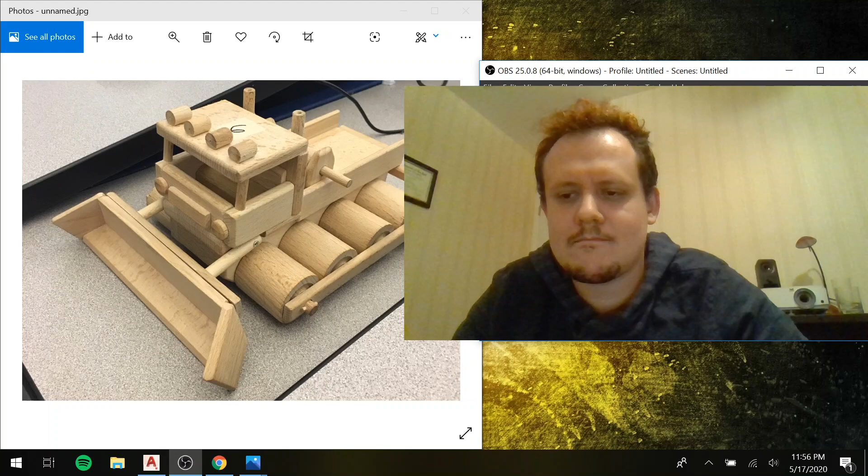I'm going to discuss the final project, which is very exciting. We get to take all the skills we've accumulated throughout the entire semester and put them together to create one final project.

The final project is worth a huge chunk of your grade, 20%, the biggest single item. But you'll have a lot of time to work on it. Today is May 18th, and the last part of your final project will be due on June 5th.

Let's get started with the first thing you'll need to do. If you go to classwork, you'll see a submission for a project proposal. You're going to take a toy or item from your household to recreate as a freehand sketch, create an orthographic of some of its parts in AutoCAD, and create a 3D model of it in AutoCAD. I'll go through these one at a time.

On the left side of the screen is an example of a toy that could work for this final project. This is a toy we'd actually use in class, and a lot of people have made this exact project. It's a great example because there are lots of little components but not crazy details, so you can make everything with extrusions. This is an ideal project choice.

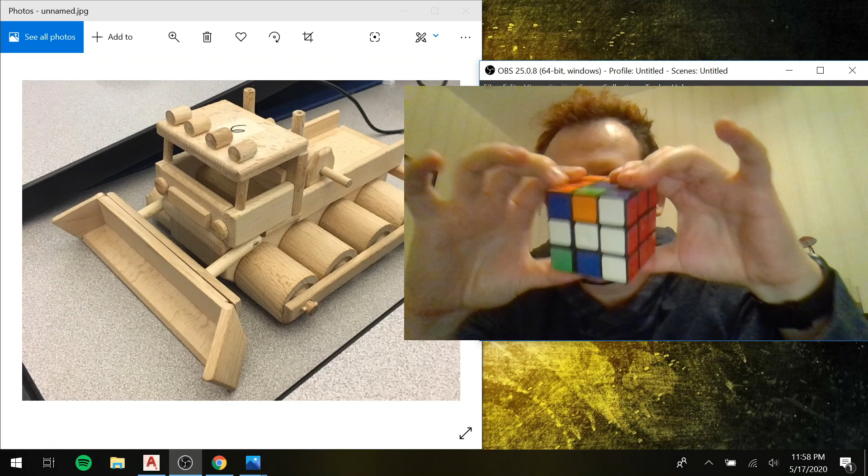I also have examples of good and bad project choices. Starting with a bad one: the Rubik's Cube. This is a bad choice because it doesn't have many components or details—it's really just a bunch of cubes, which are easy to create. If you wanted to create what's inside a Rubik's Cube, that's actually too complex. I had a student try that, and she really struggled to get all the little details, even though she was a very good student.

Before more examples, let me talk about the components. First, you'll submit the proposal: a picture in isometric view of your project. You need to submit 3 of these for approval, ranked. Check the classwork for instructions on how to submit, but you'll take 3 pictures of 3 objects, each in isometric view, and I'll tell you if it's okay so you can proceed.

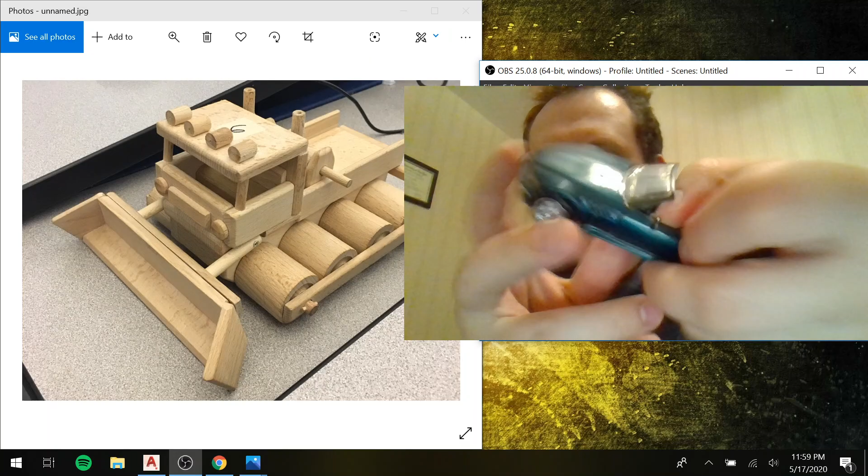Some more examples of good choices: a toy car, especially a big one, is a good idea because there are details in the wheels. I'll show you in the coming days how to make copies of these wheels so you can replicate them in many parts. There are doors too, but a small Hot Wheels car isn't quite good enough—something bigger like this is better because there are more details to work from.

Another good one to use is a Nerf gun—it's got all these little pieces. I might get in trouble for letting you make anything resembling a gun, but hopefully a Nerf gun will be okay. This is something I hope a lot of us have in our households, with lots of details you can work off of and recreate in your 3D model.

Something I don't want you to do is a mouse. You might think a mouse is pretty straightforward, but these curves are actually really hard to do in a 3D model in AutoCAD. You want to pick something that utilizes the extrusion methods I've shown you so far, like extrude, press/pull, loft, sweep, and revolve. With the gun, really all these little pieces we can make with loft or extrude—this is just a cylinder. There are details on it, but we can extrude most of these pieces very accurately. Those are some good examples of things to choose.

Now let's talk about the other components of this project. You've chosen your project, you've submitted the proposal with pictures in isometric view—make sure it's an isometric view when you take that picture. Then, once I've approved your project, you need to do the next step.

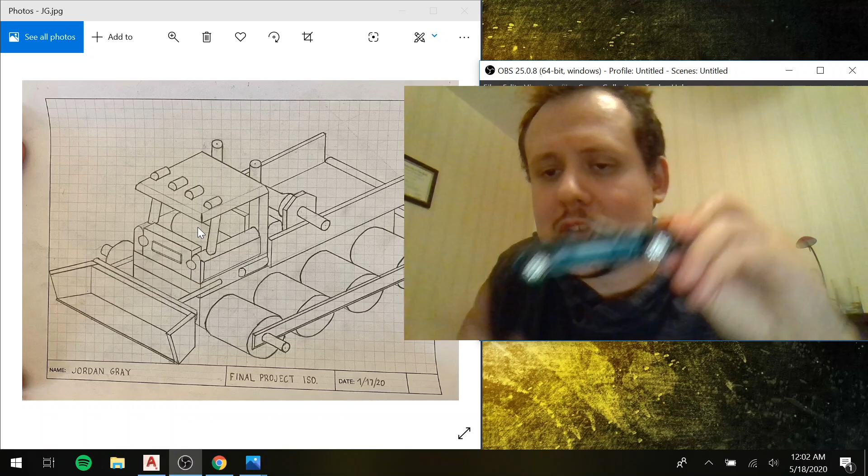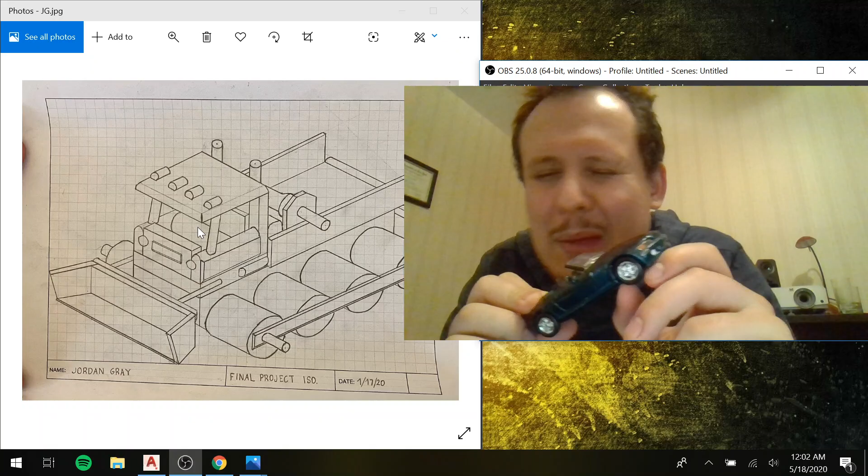You need to sketch an isometric. You'll get this grid file we've seen before and printed out and done projects on. You'll print this out and draw an isometric, trying to get the proportions as close as possible to correct, but you don't need to worry about making the size perfectly correct—just get the proportions close. So if I was sketching this piece, I wouldn't measure each little part to make it 100% accurate; I'd just try my best to make it proportionally correct. I might measure these wheels and say that's a half inch in diameter, even though it's really 0.48 inches, but I'll estimate and get the proportions based off of that. That's a great approach, but don't worry so much about getting it 100% to scale.

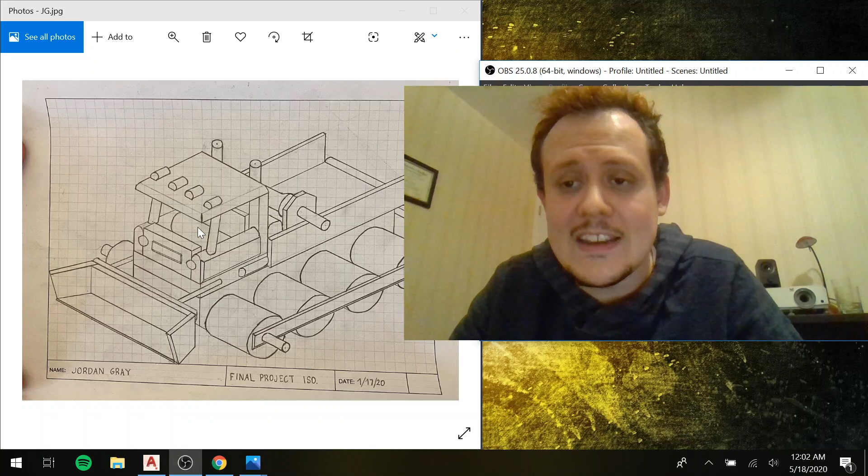So that's going to be the isometric. That isometric is due on the 26th of May, and the pictures I mentioned earlier will be due tomorrow night, Tuesday.

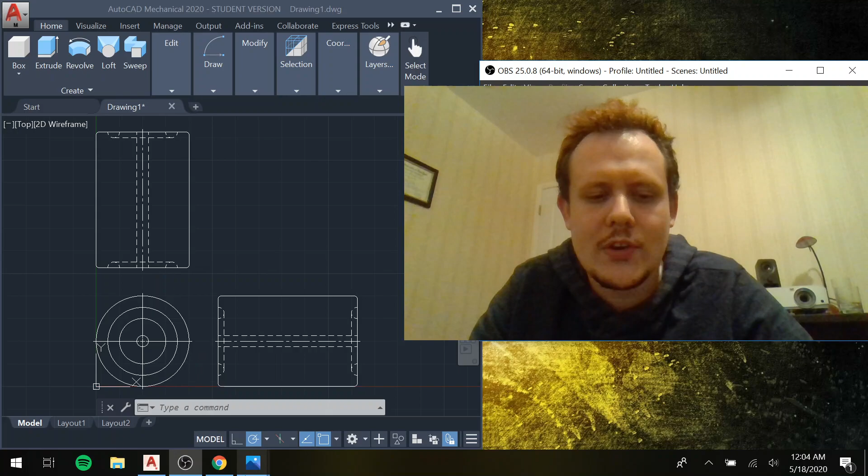After you're done with the sketch, you're going to proceed to creating orthographics of the parts. So here's an orthographic of a part, one of the wheels that we see in this shape. This is just the orthographic of one part.

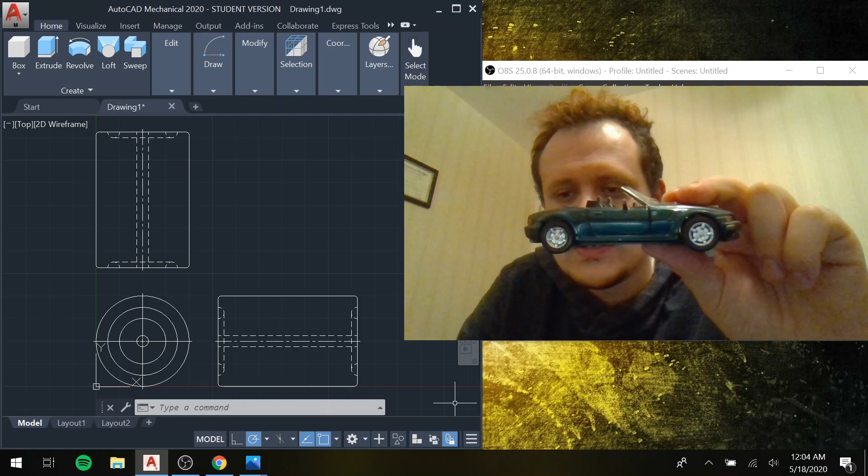I will ask you to create an orthographic of every part of your project. So for this car, for instance, you would make an orthographic file for the door, for a wheel—you don't need to do it for all 4 wheels because they're the same, just one—and for the steering wheel. If you're not sure how many components to choose from, I would cap it at 10 components, but you want all the essential pieces.

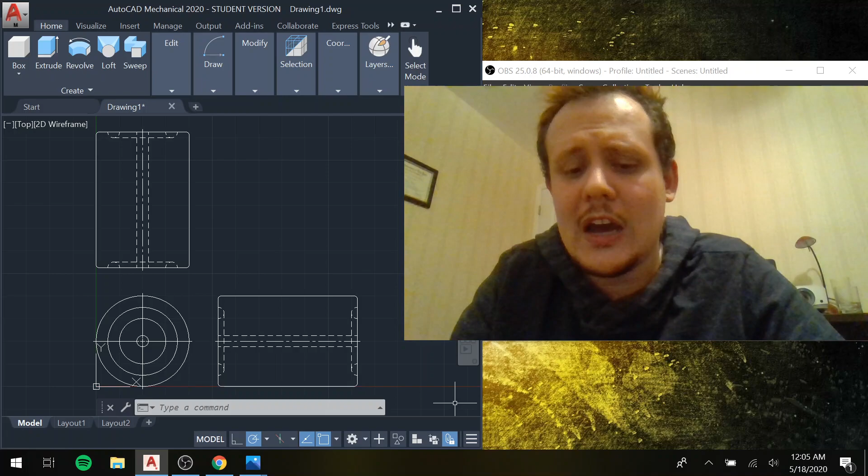If there are a lot of really fine details, you don't need to do an orthographic for every little piece. If you're not sure if you're doing enough, too much, or too little, reach out to me and I'll instruct you accordingly. We really just want the base components of whatever you're making a model of. So you're going to create an orthographic file for each component—this is an orthographic file for just one wheel.

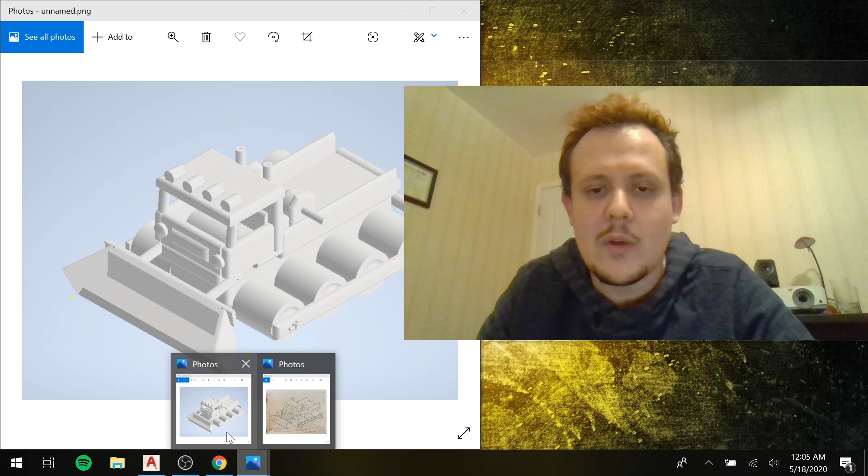And then the last thing you're going to create is the 3D model in AutoCAD, using all of the methods that we've learned.

The orthographic parts that I just showed you are going to be due on the 31st of May. All of this is in the post I made, so you should refer to that for the due dates.

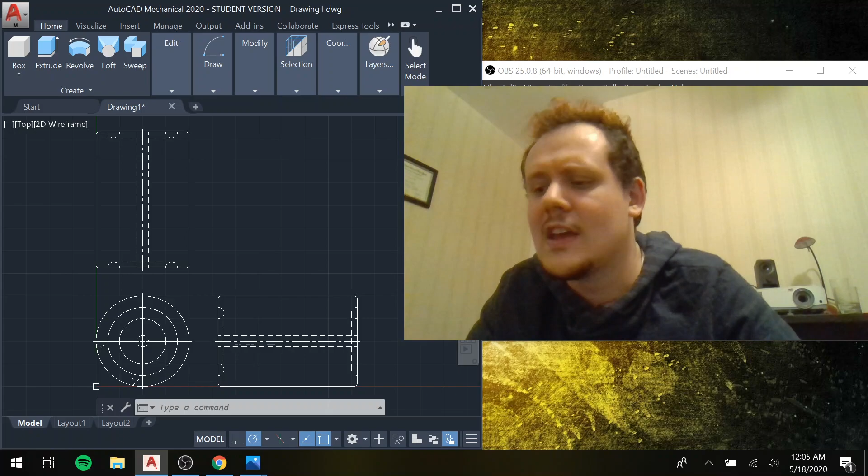Then the 3D model—I'm going to give you the most time to work on this because it's really an involved piece. At least half of it should be complete by the 2nd of June. The final thing, and anything else you might have been late on, should be submitted by June 5th. For the 3D model, you're going to use all of the techniques we've covered so far.

As you're working through these components of the final project, I will be posting more videos that are going to be helpful. As I'm looking through proposals, I'm going to think about which CAD techniques are going to be necessary for a good amount of you to complete your projects, so I'll be putting out those videos and be available for questions.

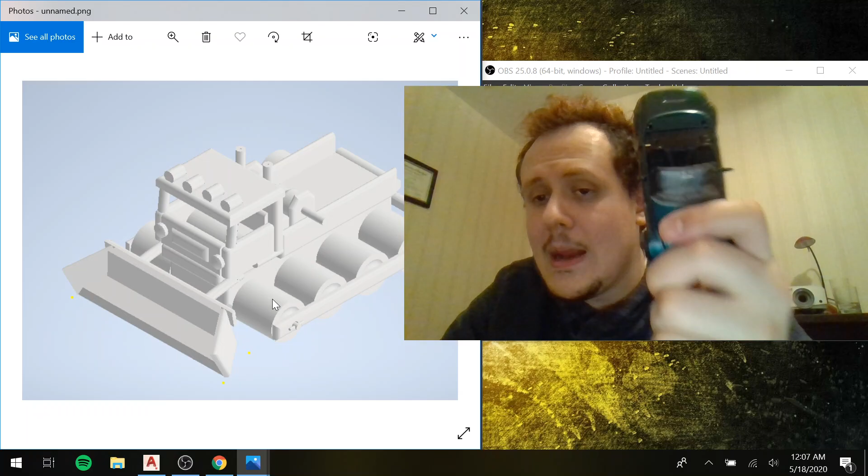Just to review, you're going to submit 3 proposals of things around your house that you want to create. It can be something from the internet—if you don't have anything good from your house and found something good online, you can post a picture from the internet, but it will be trickier to take measurements and get everything proportionally correct when you do your isometric, orthographic parts, and 3D model if you can't measure it.

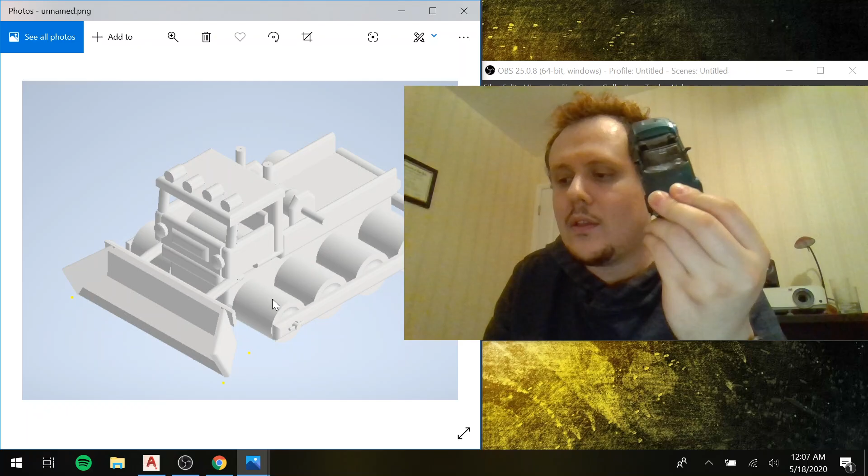So, 3 pictures for your proposal of 3 different choices, and I will let you know if it's okay as quickly as I can. You'll rank them in terms of your preference.

You're also going to sketch an isometric of the part. It does not need to be to scale, but should be proportionally correct, so it looks right. It doesn't need to be 100% to scale, however.

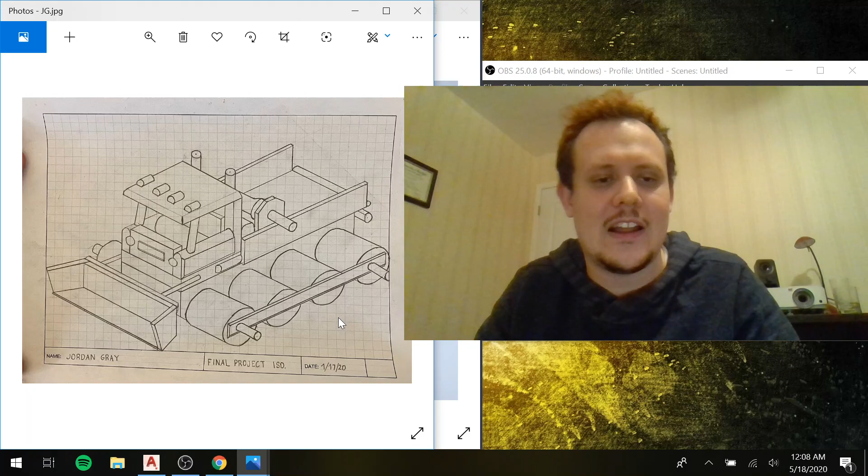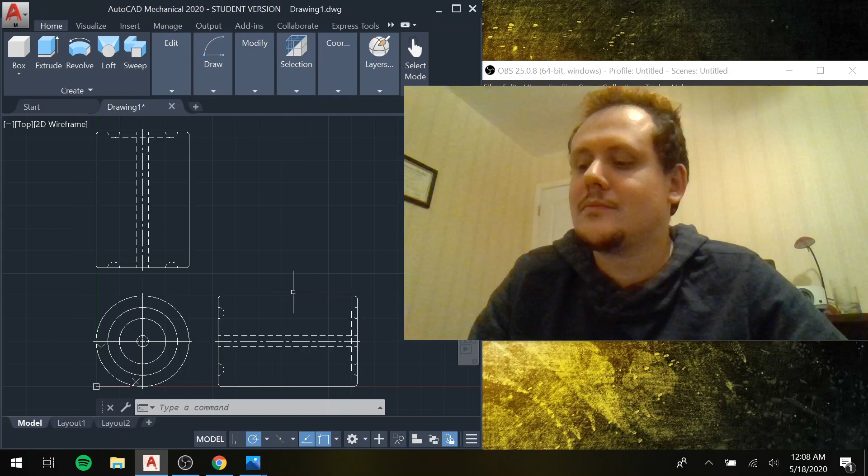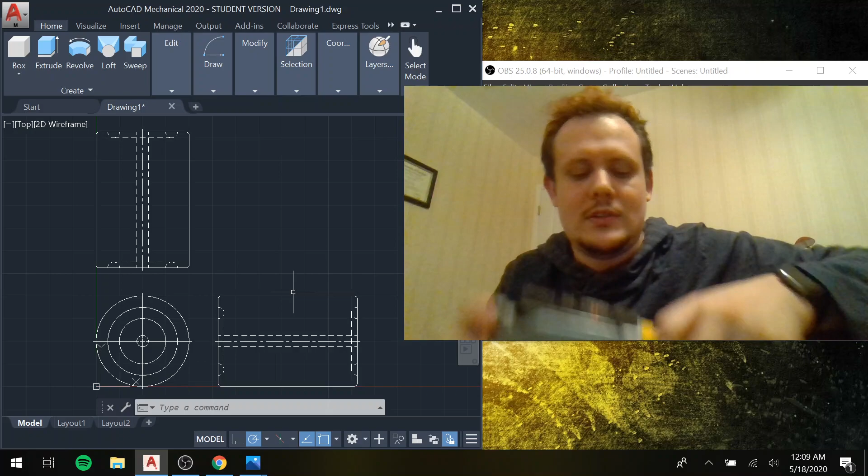What might I leave out of here? This is actually a really good project choice, I think. I might leave out the inner workings, but I would do this piece that moves for sure as one part. That will include all hidden lines, center lines, everything.

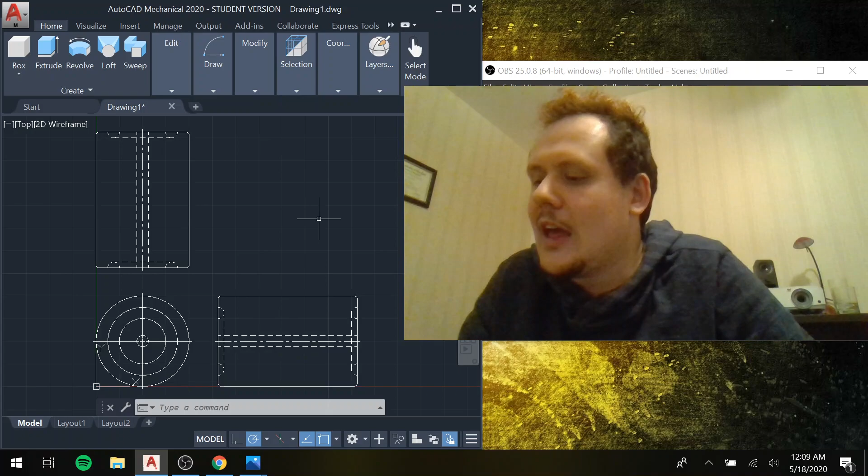And then the last thing is you're going to create the 3D model of your project, and that'll be everything. We're going to have a good amount of time to work on this, about 3 weeks.

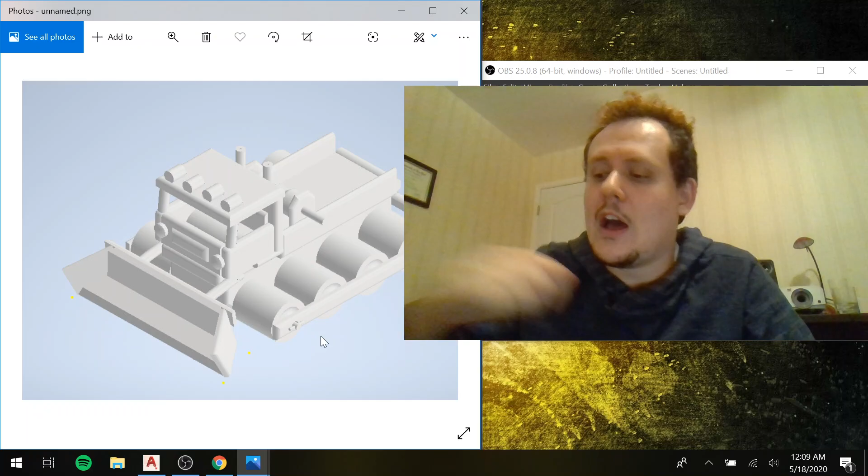Make sure you're getting started as soon as possible. Submit those proposals as soon as possible so I can get the answers back to you about whether you can proceed with that project. Okay, that's it for today.